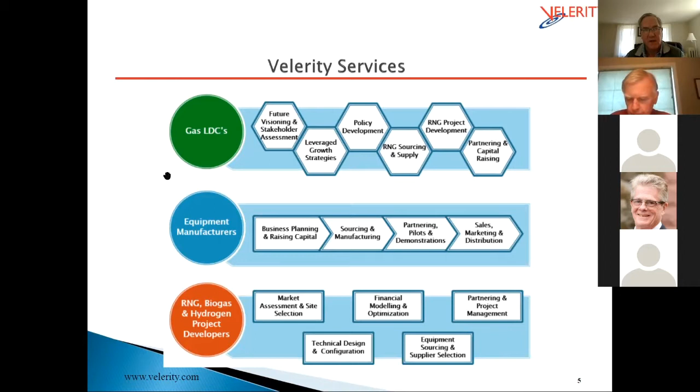This is just an example of some of the companies that I've individually worked for in helping them develop new products and services, investigate technologies, look at markets, raise capital, etc.

One of the reasons we're talking about renewable gas is that in the last 5 years, we've been investigating, both Velerity and the Hydrogen Energy Center, a number of potential projects in this area. We were hired by the Small Business Administration and the Connecticut Center for Advanced Technology to assess market development opportunities for hydrogen in the Northeast.

Oh my goodness, and two areas came out of that work for focus. If everybody could put their microphone on mute, that would be appreciated. The two areas that emerged: one was island grids.

So literally islands are putting in solar plus storage to eliminate diesel. We found that it was economic to add a hydrogen storage solution for power as well, because most island projects were only putting in about 50% new power and keeping the diesel, since it was too expensive to provide the storage through lithium-ion batteries. Hydrogen has a role in helping bridge that final gap.

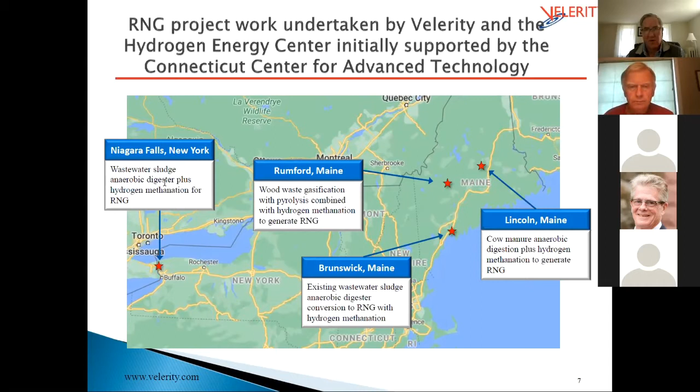One slide on the Renewable Gas Consortium to advance this area. We expect it to be a $10 billion development in the Northeast in terms of investment to capture these biogenic sources of carbon and put them to work. The 4 areas are project development, knowledge forum, policy development, and the industry network. If anyone's interested in learning more about this initiative, please feel free to contact me.

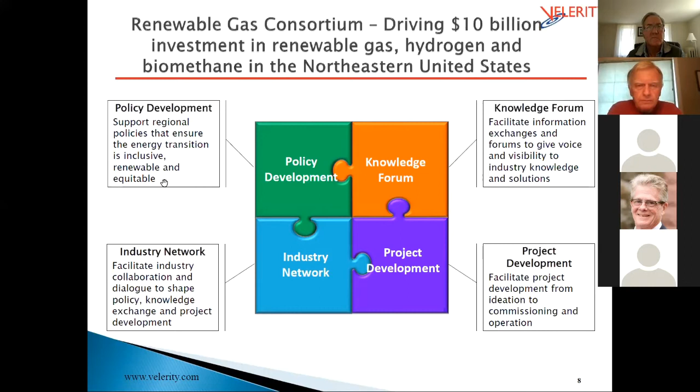So now we're going to talk specifically about what's going on in the gas industry. There are really 4 key drivers here. One is the gas industry is under pressure — there have been bans on new gas hookups, reversals on pipeline expansion plans, and calls in legislation to electrify everything and achieve significant decarbonization. It is kind of a troubling storyline for the gas companies.

We also see that people are concerned about the stability of the electric system with the high penetration of renewables. On the positive side, renewable costs have been declining. There was just an announcement in India this past week that a solar PPA was signed for close to 1 cent per kWh, and Saudi Arabia announced the same thing this morning — just over 1 cent per kWh PPA for solar. That's extraordinary; it enables very low cost hydrogen.

That would be about a 50 cent per kilogram hydrogen on a marginal cost basis. We also have another trend, which is curtailment of wind and solar, occurring all over the country. Right now in California, over 1.5 million megawatt hours a year are curtailed of wind and solar — that's enough power for 300,000 homes full time, which is extraordinary. It's a complete waste of electrons.

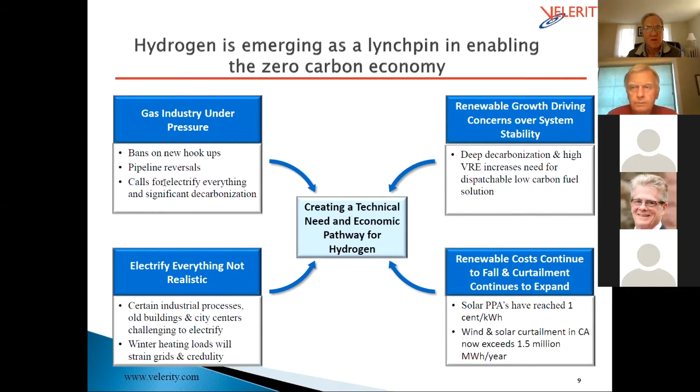We'll go quickly — this is the issue for the gas companies. You can see in the Northeast that CO2 emission reduction targets for New York and Massachusetts are 85%, and the remaining states have basically 80% reduction targets, which is significant. In New York, for example, natural gas is responsible for about 34% of all carbon emissions, so a future without reducing carbon emissions from natural gas doesn't equate with the aggressive plans in New York.

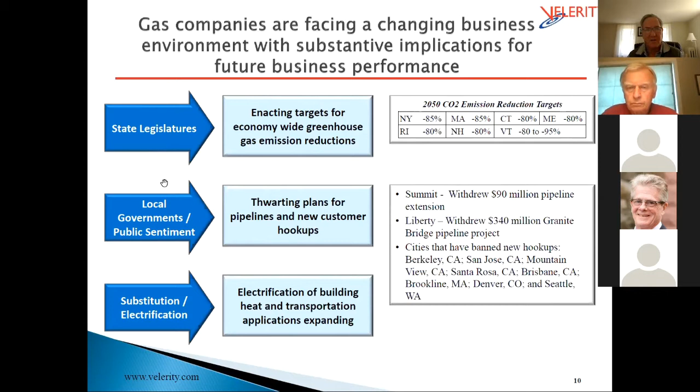There is, however, a vision that could be used for gas companies to actively participate in the future of the energy transition. One company extraordinarily far down this pathway is Vermont Gas, for example — they've embraced pretty much all of these initiatives in defining who they are. They want to see the gas industry put forward a renewable portfolio standard for decarbonizing the gas grid, aiming for 2% a year decarbonization of the gas grid. That's wonderful to see — it's fairly surprising, kind of aggressive, but it shows that people in the industry can turn around and embrace this decarbonization pathway and implement policies to move down that path.

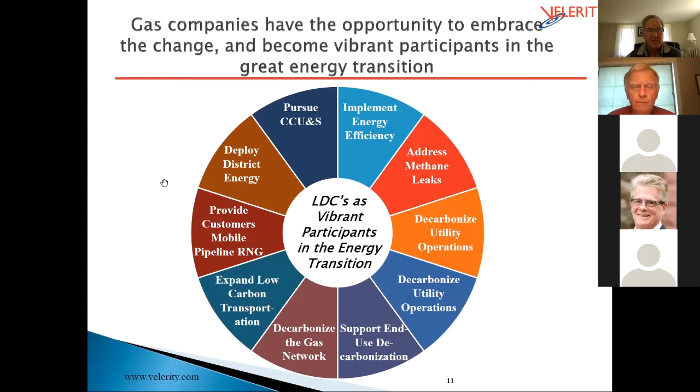Questions arise, however. Are there sources of renewable natural gas and hydrogen that are cost effective and can meet the scale required for the industry? Is there a regulatory pathway that enables the business model to be successful? Can you imagine if you have a network of gas pipelines and half of your customers go away? How do you support the remaining capital costs you've invested in that pipeline on the remaining 50% of your customers? Well, you can't. You need some structure that enables that kind of shift. So there's a reverse network effect on the economics, and these are the kinds of concerns that need to be addressed.

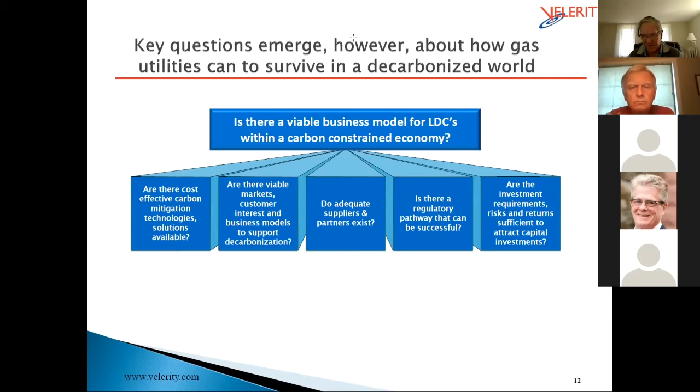So let's shift to hydrogen. We see that there's a need emerging for hydrogen as a solution. And just in the last 12 months, as everybody has seen, there are a lot of industries embracing hydrogen. And there's some concern there because we've got to make it work out, not just technically, but economically.

But the same kind of drivers that we've been talking about. We do have a future session on transportation and hydrogen, and we're seeing very large consortia of companies embracing hydrogen for long haul and heavy trucking, as well as shipping and aviation, which are fundamentally good use cases. We're also seeing decarbonizing of industrial applications: steel manufacturing, cement manufacturing, ammonia and refining. We currently produce something like 130 million tons a year of hydrogen around the world, and it is a very large emitter of carbon right now.

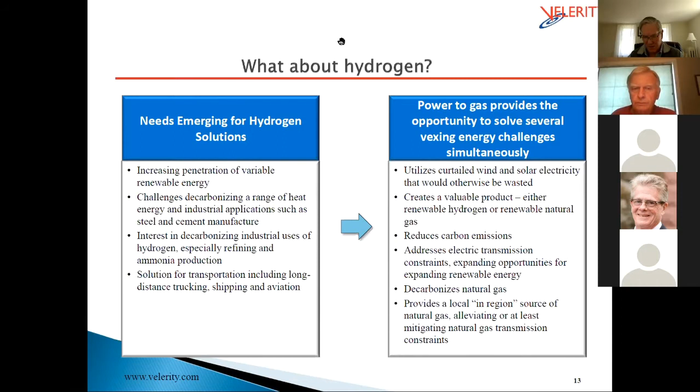In Europe, there are approximately 128 power to gas projects, as of last year. There are different types of projects, multiple feedstocks. Some include methanation, some don't. Europe is well ahead. Germany actually is the leader in this area.

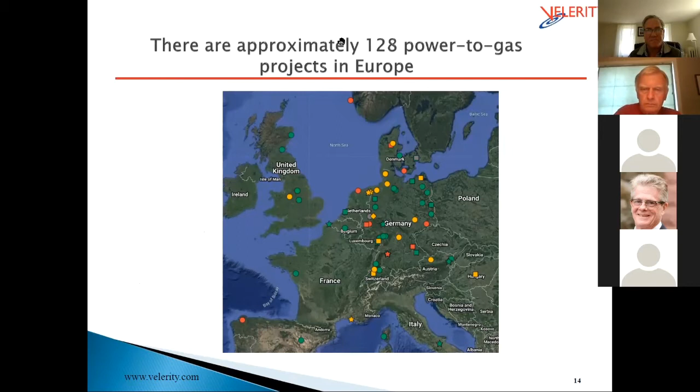The commitments on green hydrogen are extraordinary. And why are they extraordinary? Well, we're going to see a market develop. It's going to increase in size by a factor of 40. I mean, I can't imagine being in an industry and saying it's going to increase by a factor of 40, but that's what's going to happen with the electrolyzer market. Four countries plus the EU have committed to 100 gigawatts in electrolyzers by 2030. We usually talk about electrolyzers in megawatts, so they're already up at the 100 gigawatt level, which is extraordinary.

We do see wind to hydrogen emerging, and we are going to have a session that addresses that. And then ammonia production has been very quick. We see some fairly sizable commitments by industry to producing green hydrogen to feed their ammonia plants.

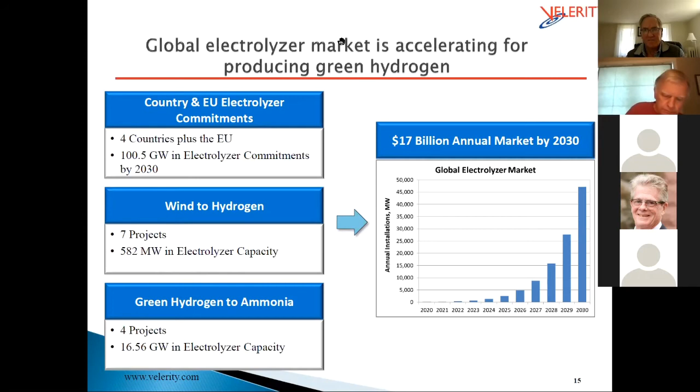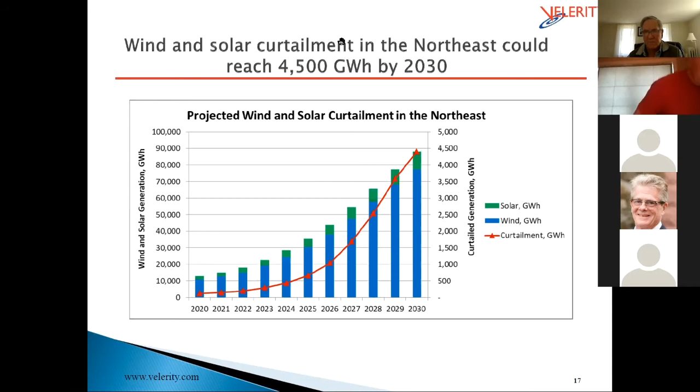This is the projection in the Northeast. We expect to have something like 30 gigawatts of offshore wind developed from Delaware to Maine. And that's an extraordinary amount of wind. We can imagine, for example, in the shoulder months when the grid does not need as much power, that we're going to have significant overproduction of wind and solar capacity, creating an opportunity for hydrogen.

One of the questions that comes up is the color of hydrogen. We've focused a lot on green hydrogen, which is fairly straightforward. You take wind and solar power, and even water power, hydropower, and you run an electrolyzer and produce hydrogen. There also are other methods.

One we'll talk about later today certainly is turquoise hydrogen, which is the methane pyrolysis, which is part of this presentation. And we also are going to talk about blue hydrogen as well, which is just the classic carbon capture and storage with steam methane reforming. They're doing this up in Canada to a very large degree. I think they spent $1.5 billion building a carbon capture and storage system in Alberta that is connected to steam methane reforming.

So I apologize in advance for this chart because it's very busy. But let me see if we can help sort of focus on what it is and why we're looking at it.

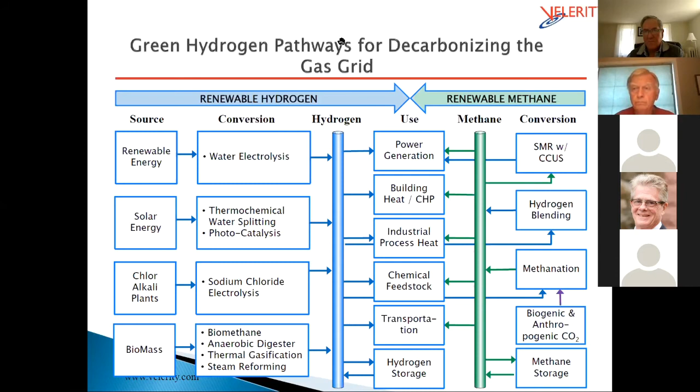And the estimate is that a combination of renewable natural gas and hydrogen can meet about 61% of that requirement. This is the natural gas requirement without the power plants included. These are held as a separate category.

You can see that different states - Massachusetts from the left, New York - those are the major states. And then you can see New Hampshire, Vermont, and Maine, they have a surplus of renewable natural gas opportunity.

Just to mention where the renewable natural gas comes from, this includes both anaerobic digester gas as well as thermal gasification. It also includes methanation with the capturing of the excess carbon and utilizing hydrogen to get the increase in RNG production, as well as direct hydrogen represented in the green bar.

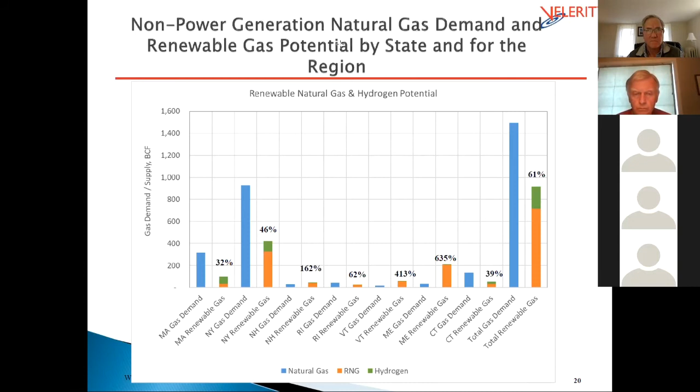So what are the hydrogen pathways? Hydrogen blending, 100% hydrogen, methanation, hydrogen power production, and pyrolysis.

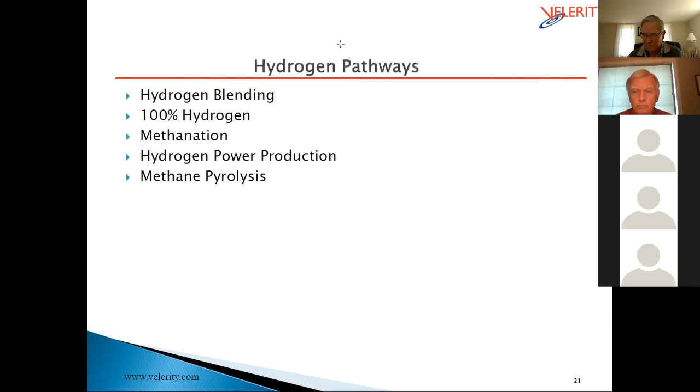We have a number of blending projects around the world, more than are listed here, certainly. This Keele, England project was significant because they did 20% hydrogen by volume on a campus setting with 130 buildings.

I do want to point out that 20% hydrogen by volume is actually only 7% on a BTU basis. In other words, hydrogen is one-third as dense as gas in terms of the amount of BTUs it holds.

So, 20% hydrogen by volume is only 7% hydrogen by energy.

The second thing is that it's much easier to deploy blending further down in the network. You don't have to worry about compression stations and switch boxes and so on.

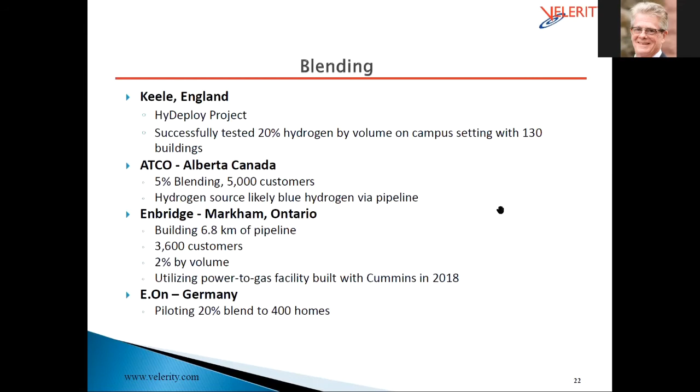SoCal Gas and San Diego Gas and Electric have announced a project. They're starting with 1% hydrogen by volume, and again, they're working far down in the network. I think this is the one where they're testing certain network configurations in terms of the materials that are in the pipeline as they go forward.

ATCO is the Alberta, Canada project. Additional information is that they'll be using something like 52,000 kilograms of hydrogen per year in this project, so it will have a significant effect even though it's only a 5% blend.

I also want to point out there's a fascinating project that NREL is leading, which is the HyBlend project. Mike, are you on the call?

Yes, I am. Oh, sorry. I think he means me, Mike. Oh, I'm sorry, Jason. Plenty of mics out here.

Yeah, so Brad, thanks for the introduction. Yep, leading the HyBlend effort, a DOE effort. That's a $15 million effort looking at material compatibility, techno-economic analysis, and life cycle assessment with hydrogen blending. I put a link in the chat to the press release on that, as well as a list of the public companies involved.

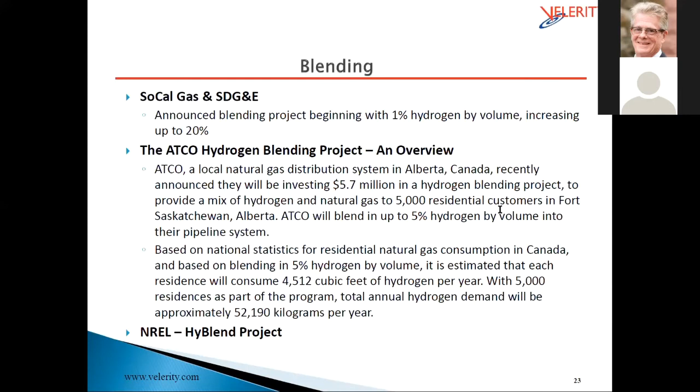Thanks for that, Mike. We also are seeing 100% hydrogen in the gas distribution network. The most significant project is the H100 Fife program, 300 homes in Scotland.

We also have a project in the Netherlands, already completed, using 8 electrolyzers providing hydrogen to 25 apartments, with hydrogen boilers providing heat and a gas-fired boiler for backup. The next phase in the Netherlands is for 550 homes on a network.

They're very aggressive on decarbonization of the gas infrastructure in the Netherlands. H21 is a project that's been on the books for a long time. Their plan is to inject hydrogen at the city gate of Leeds, serving 264,000 customers—a fairly significant project.

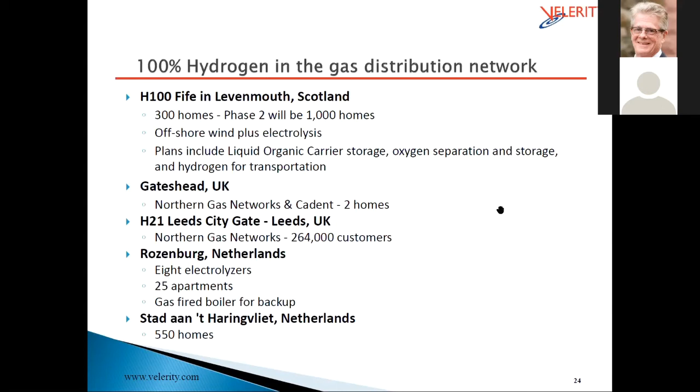Not necessarily underway as yet, as I understand it. This is the Leeds project, and just to be clear, it includes a combination of maintaining the gas infrastructure and using steam methane reforming to separate carbon, then putting that carbon offshore in deep well sequestration.

It also includes, as you can see with the little windmills there, hydrogen generation through electrolysis, and a 100% hydrogen pipeline providing homes and businesses with gas.

We also are seeing an effort to decarbonize industry, and this does not necessarily include the local gas pipelines, but it does use direct pipelines, because these projects are being designed from a single user perspective—in other words, feeding hydrogen directly to a manufacturing facility.

Decarbonizing steel manufacture is one example of these projects. Another is ammonia; we're going to see continued growth in ammonia production using green hydrogen. The Iberdrola project in Spain is fairly significant, including a 100 megawatt solar facility and 6 gigawatts of electrolyzers.

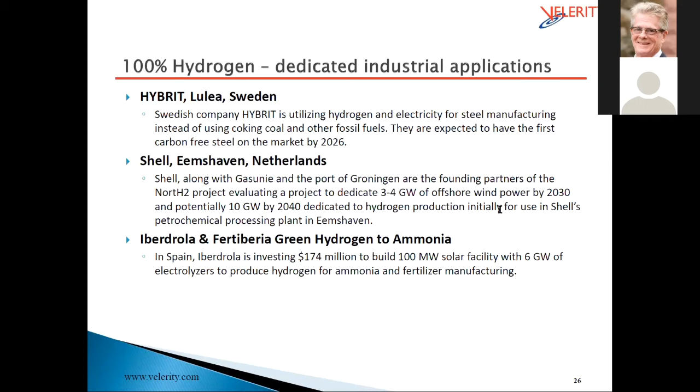For green hydrogen to produce ammonia as part of fertilizer manufacturing. I've mentioned methanation a few times, and this is how it works: you have biogas, for example cow manure, going into an anaerobic digester, producing 60% methane and 40% CO2. Then you can add a renewable hydrogen stream to the process to capture that additional CO2 and increase the amount of methane you produce.

What's fascinating is that the cleanup step can be partially eliminated from the biogas by using methanation, because a big expense in the cleanup step is eliminating CO2 from the biogas stream, and methanation can actually serve that function.

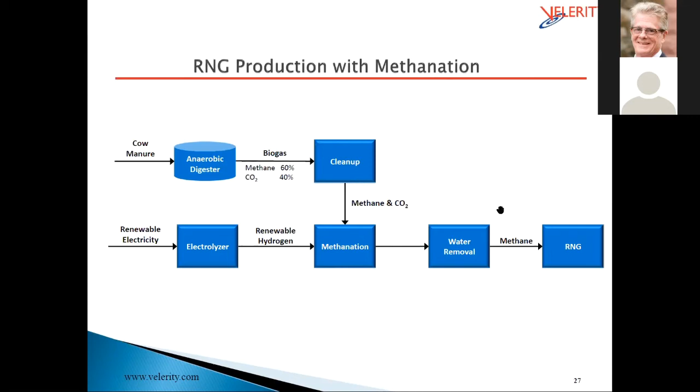Some of the projects pursuing methanation in the US and around the world: Summit Natural Gas is pursuing a $20 million project in Maine, which will take in manure from 6,000 cows across 8 farms, produce biogas from an anaerobic digester, and then use methanation to capture the CO2 and produce additional renewable natural gas for their system.

In San Diego, SoCalGas is using a bioreactor for methanation that NREL has been working on—it's from Europe.

Northwest Natural is putting in an electrolyzer plus methanation system for renewable natural gas production. That same set of apartments in the Netherlands actually ran a project for 5 years where they did methanation to produce synthetic methane for heating 25 apartments. So it's a way of greening up natural gas.

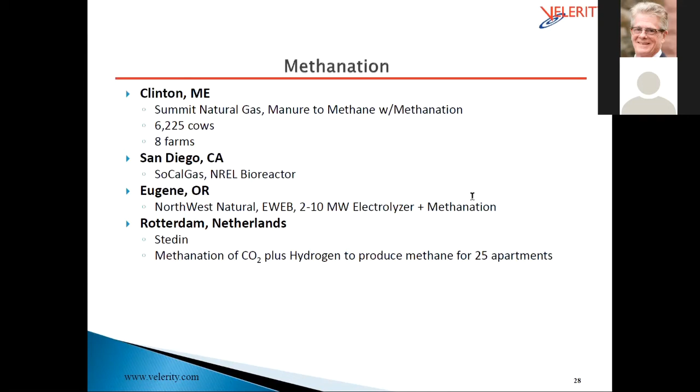The development of the system in Summit that Summit is pursuing in Maine - this is just a little bit of detail. They actually use a gathering system. Historically, anaerobic digesters were put on individual farms. Here, there's a gathering system for 8 farms, and then at the gathering point is a much more major facility, which can be co-located with the natural gas pipeline and an electrolyzer as well. Maine has significant oversupply and curtailment of wind power, creating an opportunity for low-cost power for hydrogen production. The same with upstate New York.

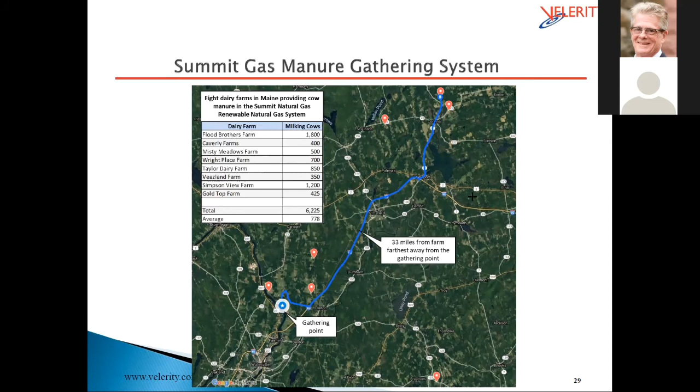A really fascinating technology to watch that not many people have heard about is called methane pyrolysis. Methane pyrolysis takes CH4 methane and separates hydrogen and carbon using a high temperature process in the absence of oxygen.

There's a plant in Nebraska, Monolith Materials, which has been operating for a couple of years. They primarily produce carbon black - the plant is designed for 14,000 metric tons of carbon black a year - but they also produce very high quality hydrogen in this process. Accordingly, they now are planning to produce green ammonia using that hydrogen, in a much larger plant. They may be investing something like $1 billion to do this. So they're actually going to capture their own hydrogen and produce ammonia - a plant producing carbon black, which is used in tires and rubber and so on, and producing ammonia.

Another major investment is C-Zero in Santa Barbara. They just received $11.5 million of investment to develop their methane pyrolysis process. Why is this important? It enables gas utilities and power producers to move natural gas to a power plant using existing infrastructure, and then produce precipitated carbon, or molecular carbon, solid carbon. It's much easier to deal with carbon dust than carbon dioxide, and be able to produce hydrogen at the power plant and then have the power plant run on hydrogen using a combined cycle gas-fired turbine.

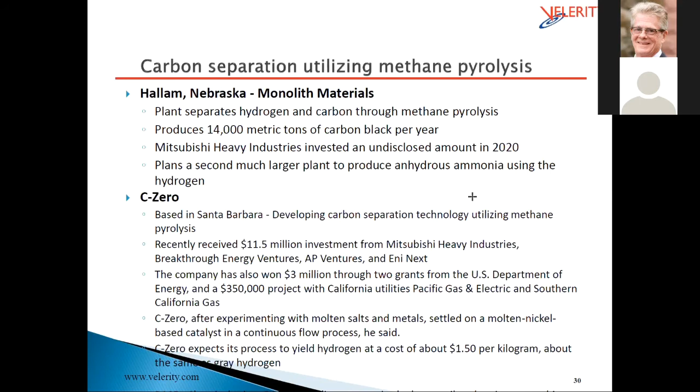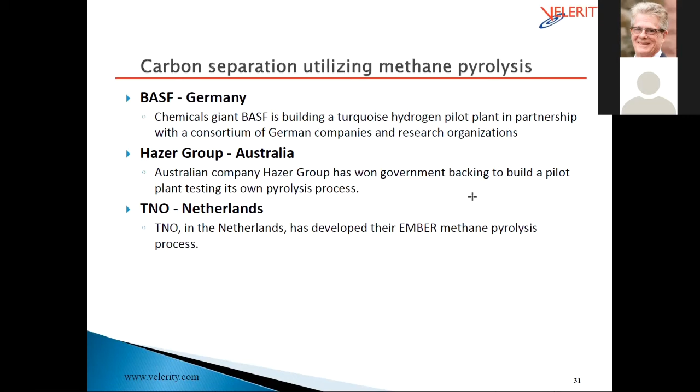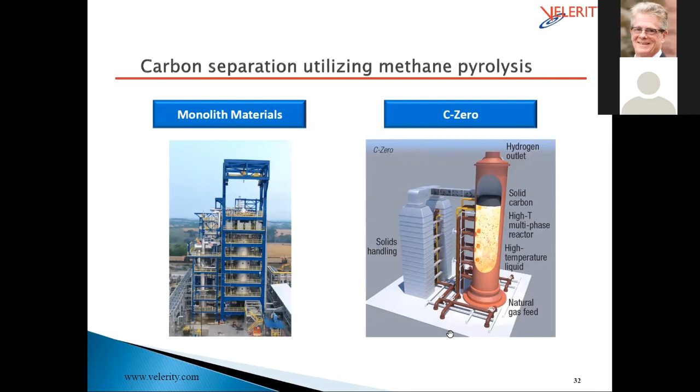So that's it for the structured part of the presentation, and I think we can open it up to questions.

I have a number of texts here from Doug Brown that are some of the questions. Rick, I don't know if you see some questions that might be good, or Doug, if you want to speak up as well. Somebody's asking if the slides will be accessible - yes, they'll be available.

Brad, there were quite a few questions about hydrogen blending, and I know you addressed blending generally, but I think it would be helpful to talk a little bit more about what has to happen to the pipelines in order to have a larger percentage of hydrogen than is possible now, and the fact that some of the natural gas pipelines used today can't take any hydrogen.

Yes, and I'm perfectly willing to hold up my hand and say I have limits to my knowledge. I do understand that in Europe there's been a fair amount of pipeline construction in the last 20 years, and they have purposely made those pipes hydrogen ready. Hydrogen is about 74% the size of methane, in its natural form it's H2, and so it does have a tendency to want to leak, but it's not as bad. The new plastic pipes deployed over the last 20 years are impervious to hydrogen.